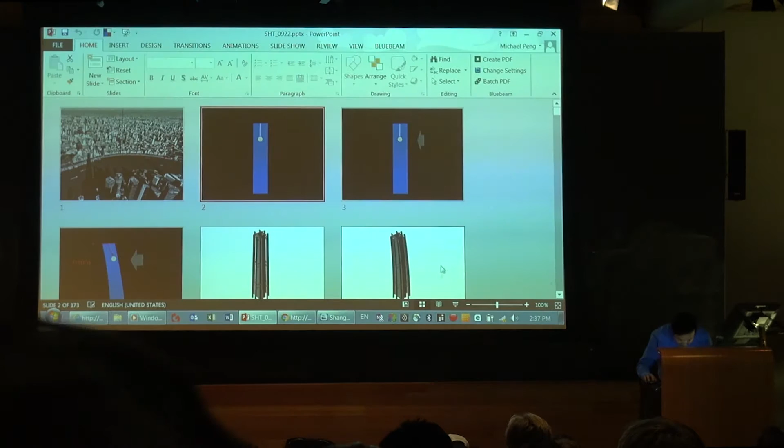It's a really quick experiment I did in my bathroom. Sorry, it's kind of rough. This is like the structure of the building, right? So if a typhoon comes in, it moves fast like this. And then if you add more weight on it, look what happens. Yeah, it's getting slower, right?

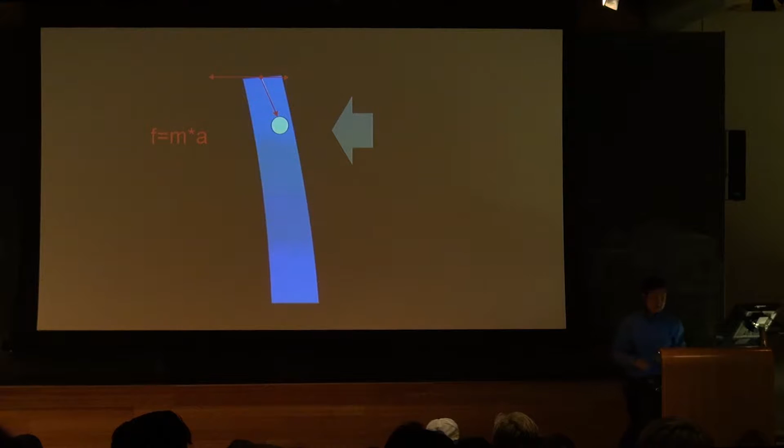So it's actually a comfort issue, and it also helps protect the structural joints of this building, because the seismic will hurt this kind of connection. And so this is what the structure does, and this diagram shows how that thing moves when the typhoon comes in, go this way, even go this way, right?

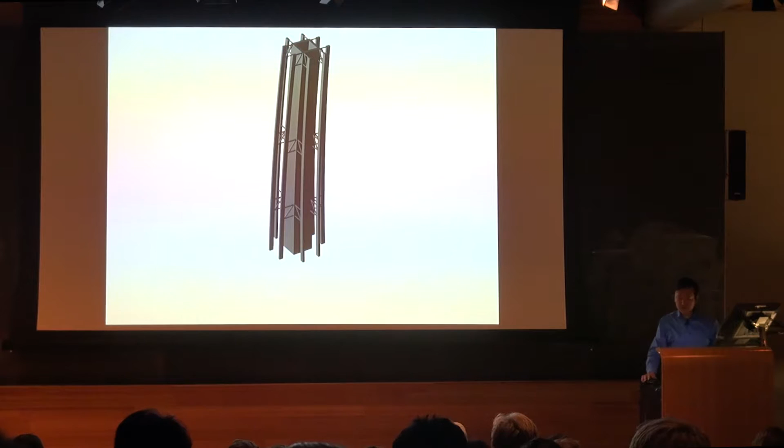So we have the typical regular structure system. This is the core inside. We have a super column outside, and then connect with the outrigger here. So this diagram shows the overall structure system. And this structure is sitting on the mat. So these piles go into the earth, I think around 80 meters. We have thousands of piles supporting this mat.

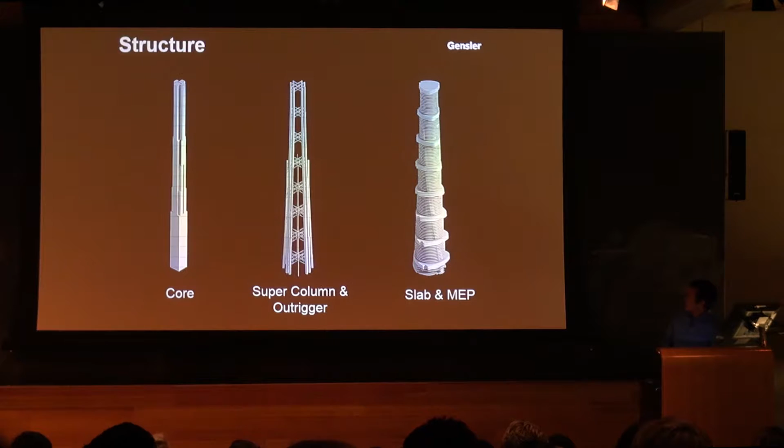So this picture shows the system of the structure. We have the core, we have the super column, outrigger, and then also the slab. And this shows the major structure and then the skin structure surrounding the building. So more detail about the structure system, you can figure out the different colors.

So we go core first, the steel wall pieces connect with this yellow beam, and then the super columns surround, and then we connect with the outrigger, and then also the belt truss connects all those super columns. That's the typical structural diagram for the Shanghai Tower.

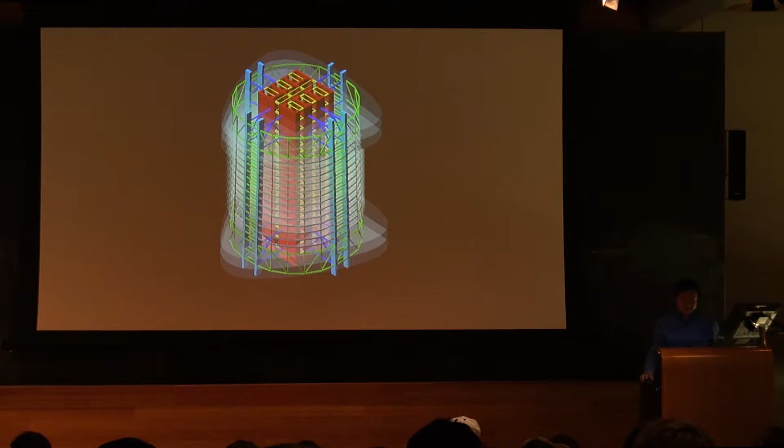So we did the test in the Beijing architecture science lab. We built this model at 1/40, and then we passed the test. It works very well.

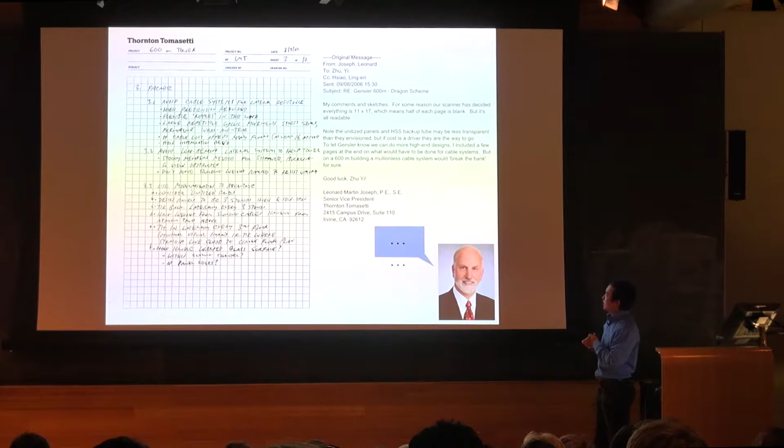Okay, so let's go back to the very early stage of the design. So I joined the competition team in 2006, and before that, we had a bunch of studies. So those people come from the Thornton Tomasetti. He's the senior engineer for the Shanghai Tower. He developed the overall system, I think.

So the first word about the structure is efficiency. Let's say cost efficiency. Because the investment for this kind of huge project is extremely sensitive. So any decision you make early impacts all the cost for the construction. So any system you use should be simple, regular, easy for construction, and cost efficient.

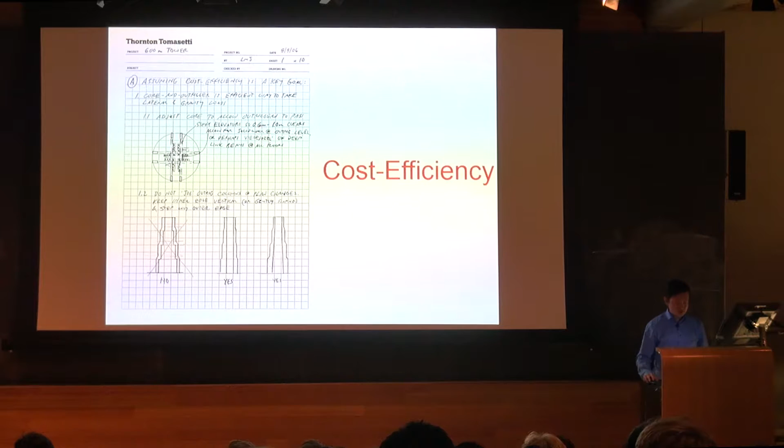So he used ten pages of sketch paper and one pencil to do this very early study, and you can see the diagram at the concept phase. This building actually used a square shape outside and a round shape inside. And later we changed this square shape to the soft triangle because of a suggestion from the wind engineer. I can tell you the details later.

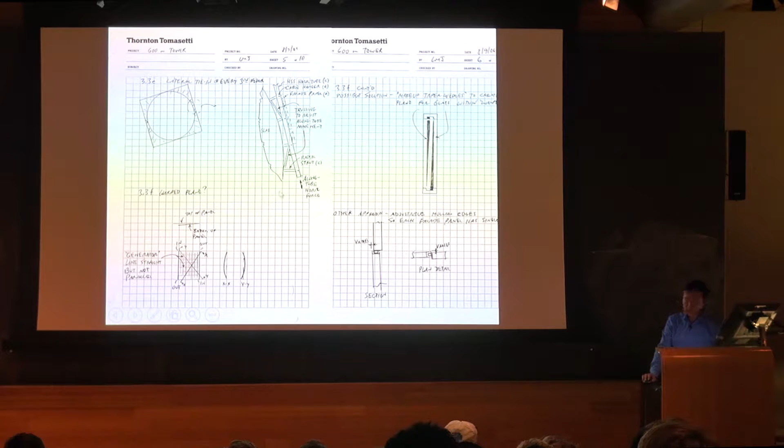And then he also mentioned if you twist this geometry, you have a lot of trouble generating the panels. So you have non-coplanar details to connect these facade panels. So at the end, I think the goal is cost efficiency, and you can see where the investment goes: structure, MEP, curtain wall and something else. This overall picture shows the cost.

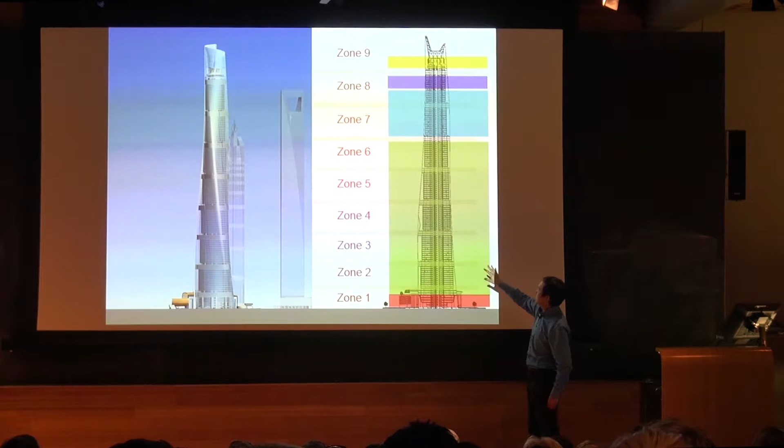So back to the tower itself, we have a simple diagram showing the function, the program. That area is the public space for retail and the conference center. The green one is the office zone. And then above the office zone, the blue one is hotel. Above the hotel is boutique office.

And then the yellow one is the observation deck. We have 3 layers of interior observation deck. And above the yellow one, we have 1 floor, level 120, the outdoor observation deck. It's still under construction right now, and we have a bunch of wind turbines in this area. So this is the very early competition rendering we did for the Shanghai Tower.

And then back to the vision for this design. The client gave us a challenge: they want this building to tell the story about China, about the future. I'm sorry it's all Chinese, but I think so.

We came out with some ideas based on the requirements from the client, and we wanted to create a geometry, a form that is really unique, both aesthetic and technically reliable. We believe this building should belong to all the Chinese people, and it's also looking forward to the future, and also looking back to the past.

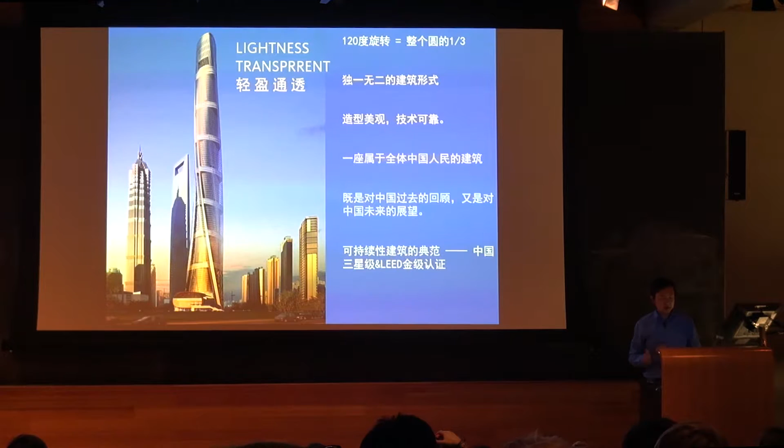We also came up with the idea of what a vertical city does, because most prototypes or developments in China use a kind of mixed-use block with high rise, low rise, public space—some typical downtown picture. So we thought, how can we make the public space vertical, so it stacks within itself?

There were only a few super tall buildings in the world that did this function, especially before the Shanghai Tower was built. We showed a simple diagram and put this kind of space around the building, matching our original idea. We have a circle shape inside, and a twisted, soft triangular shape outside. Between these two layers we have a buffer zone.

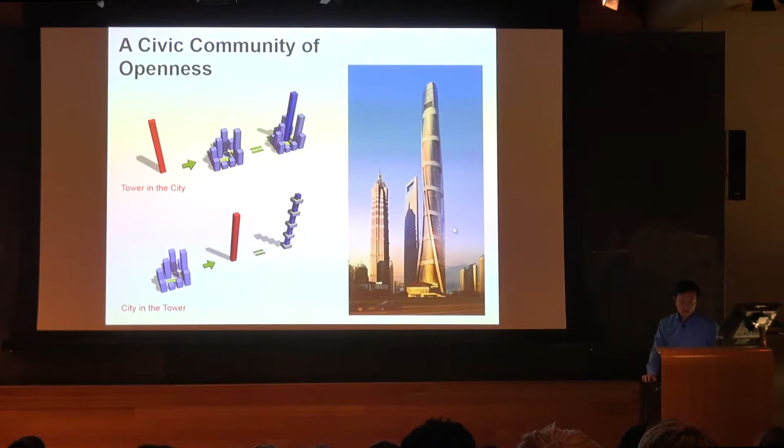This zone not only serves as public space, it also gives us a lot of benefit to reduce energy use. The idea is linked to the original Shanghai residential style—they have yards, a lot of semi-public space, and this also shows up in our atriums here.

This is the sky garden, and this is the outer layer. So you feel it—you go into this space and feel that something is far away from you. If you live in that second layer behind the glass, you see the sky or the storm slowing, everything—you feel really safe. You have a double layer of space helping keep you far from these nature scenes.

So it's a kind of unique appearance—I think a lot of people feel it right now. You have office space, your workstation in the sky, and then the second layer, the garden view, and we actually do have a traditional garden. I'll show you the image later.

Another idea was to create something really special, because these two buildings have a really classical architectural prototype—symmetric or half symmetric, with a tripartite division language. We heard some really good comments from people living in Shanghai saying these three buildings have different characters, like Jinmao and Mori Tower.

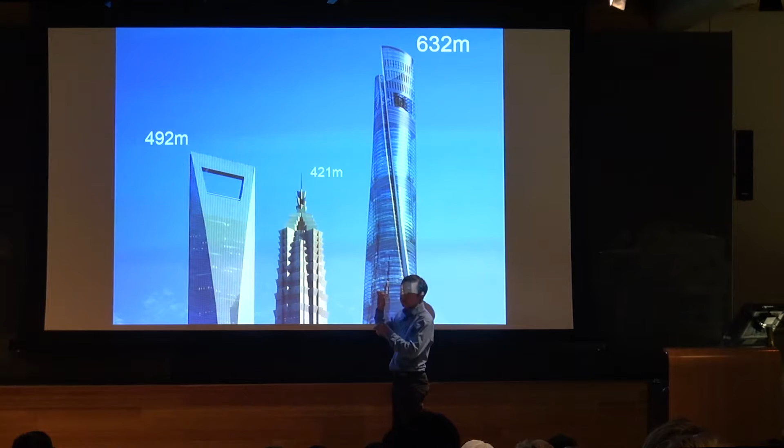Then we have this view after the final curtain wall was installed, showing the different heights of the buildings. Shanghai Tower is 632 meters, Jinmao Tower is 421, and Mori Tower—Mori Tower is 70 meters higher than Jinmao, and Shanghai Tower is 140 meters higher than Mori Tower, double the difference. So this is the relationship between these numbers.

You can see the really soft geometry gives a very special elevation. Each side of the building has the same character, unlike Mori Tower where one side has one view and another side has a different view. I think we achieved this, and the client was really comfortable with the concept.

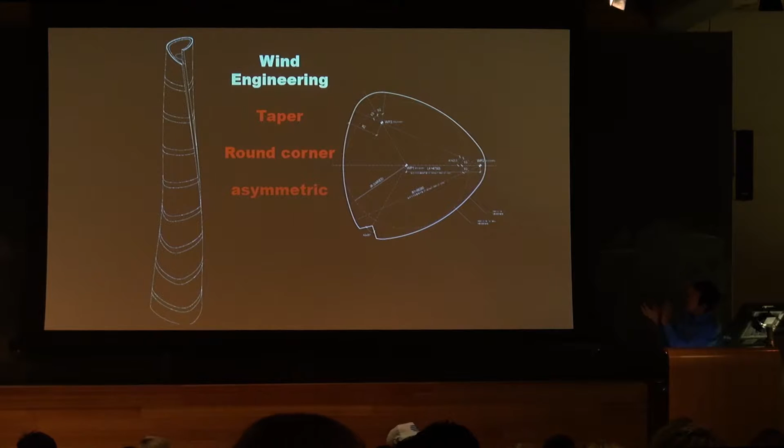It's not only an aesthetic issue—it actually came from the wind engineer early in the design. They gave us three really important comments: the building should taper as the tower goes higher, it should have a round corner, and it should have an asymmetric geometry. So we did a bunch of studies to achieve this.

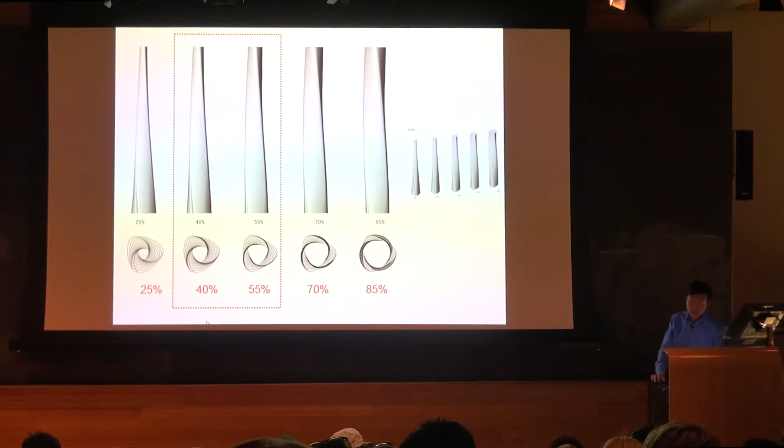The taper was kind of easy. The rotation creates a really asymmetric geometry at different levels. We worked in-house to develop a series of models and sent them to our engineers, especially the wind engineer, to test. We also did a bunch of 3D print work to address design issues.

This model was tested in Canada over two rounds of testing. The first was based on a small scale to verify the rotation of the tower—we tested rotations from 90 degrees to 180 degrees.

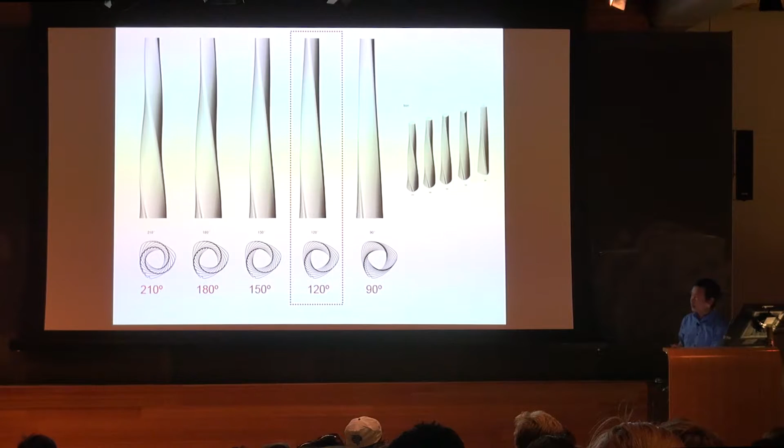From the elevation, you will feel this building is too weird, twisted too much. So finally we picked 120 degrees as the final number, and then that one shows you the result. So this is the test about the rotation.

We also did a large scale model to test the pressure on the facade. It was tested in 2008, Chinese New Year, and then in Canada.

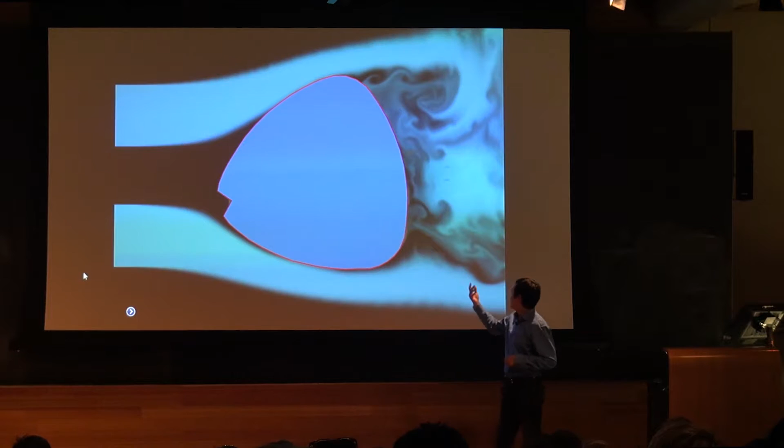Then you will see the wind profile at each level. The wind comes this way, and creates some kind of vortex at the backside, so the negative pressure is higher than the positive pressure. You can see the movement goes like this way.

So that's called the cross movement. The building in the wind will go like that, facing the wind. And this diagram tells the pressure of the facade.

The negative side has a hot part at this position, reaching up to 6.5 kPa. We use this pressure to design our glass structure.

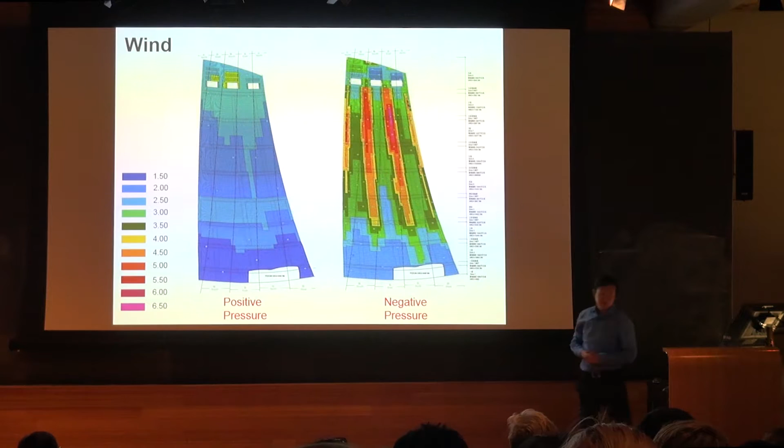You can see this number, 120, has almost a 24% reduction compared to the regular shape. What that means is you have less pressure, so you can design a more lightweight structure. That saves a lot of money.

I think we almost have 400 million for this. Close.

Then, after this geometry was verified, we went to the more detailed level of design.

You can see inside it's kind of stacking, a series of cylinders stacking on each other. In between is the mechanical zone, and the outside glass is twisted, also tapered. Then in between is our sky garden, the buffer zone, acting like insulation for the overall building, and then you have the public space here.

This one serves this zone because we have 9 zones. Each zone has 3 sky gardens.

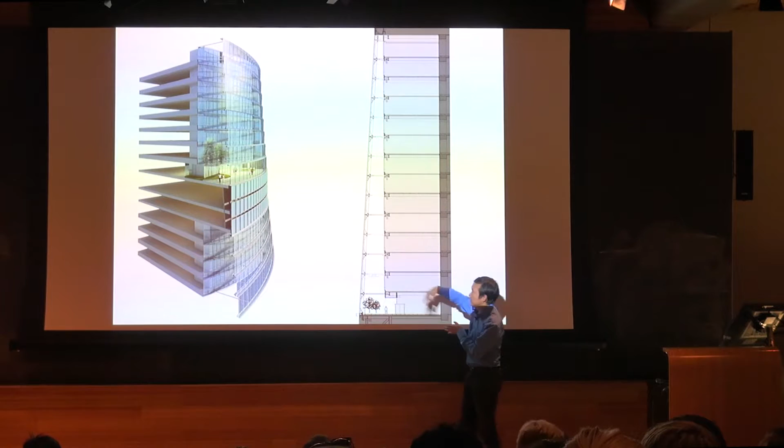So there's a 2-level mechanical zone. One is the typical mechanical space, and another one is the refuge area. Because people egress from this building, if you're from the top going to the ground, it's almost

like 1.5 hours. If some kind of accident happens, people will go to the refuge area. It's really fully protected.

Then the air has some kind of movement in the sky garden. At the top, the hot air will go to the top of the atrium and then exhaust to outside. So this air acts like insulation for the building.

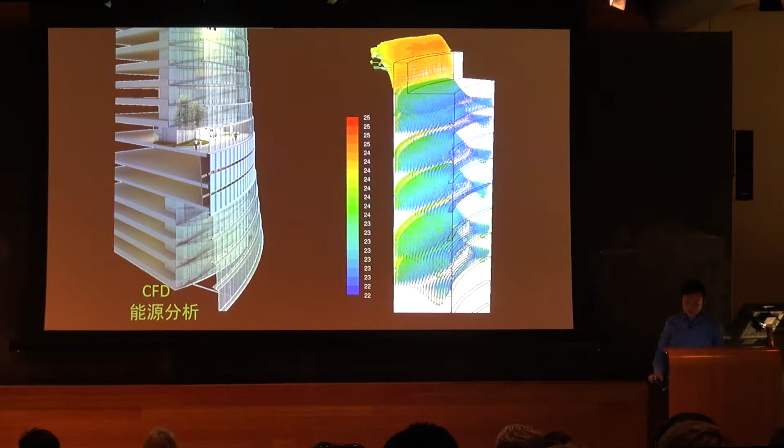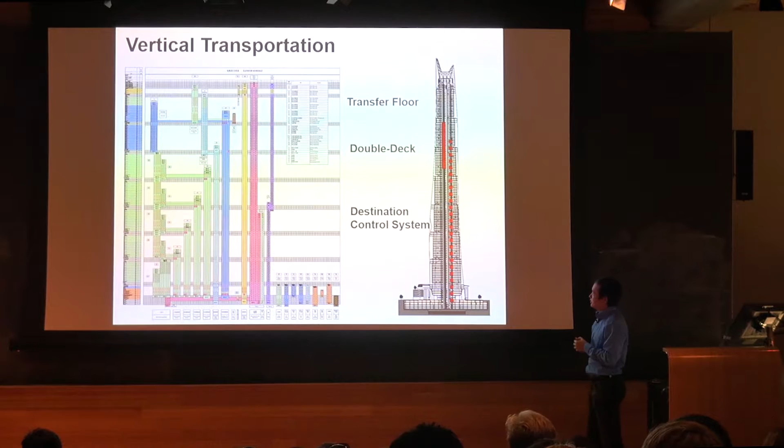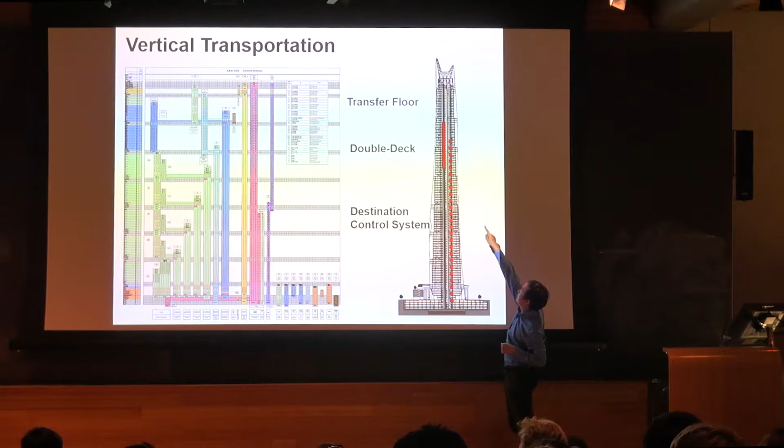108 elevators. So we need really good organization of these elevators. They should stack on each other, and for some levels, like going to the high zone, you need to transfer at the transfer level. So you take the high-speed train to the Sky Garden, and then transfer to the local

So we go like this: this is the express elevator, 10 meters per second, and you take this shuttle to this level, transfer to the local elevator, and then land in this certain zone.

The good thing is we have public space at the bottom of each zone. So for some reason, if you want to meet your friend, have a cup of coffee or some kind of food, you can go to the

amenity level, because this one provides this kind of function, so you don't need to go back to the ground using the shuttle. This reduces a lot of energy for operating this elevator system. You get the idea: the structure, architecture, and vertical

transportation work together to make the tower really efficient, so people can really live inside. And then the challenge is the shape: the geometry is twisted and tapered, not normal compared to a typical super high-rise.

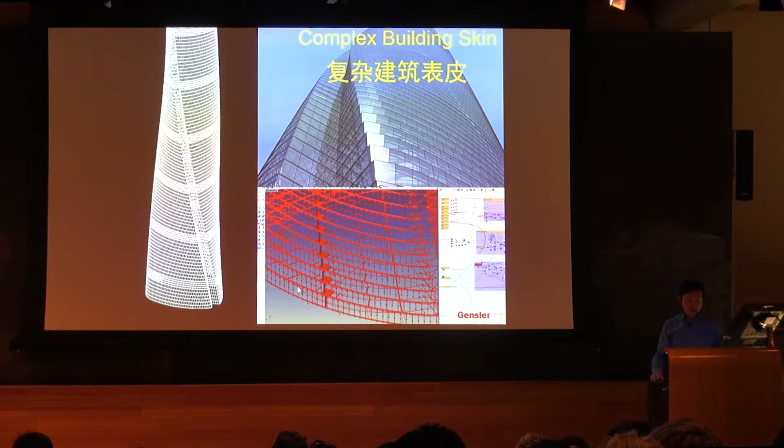So to develop the system, we did a bunch of work on how to define the system and the building's overall geometry.

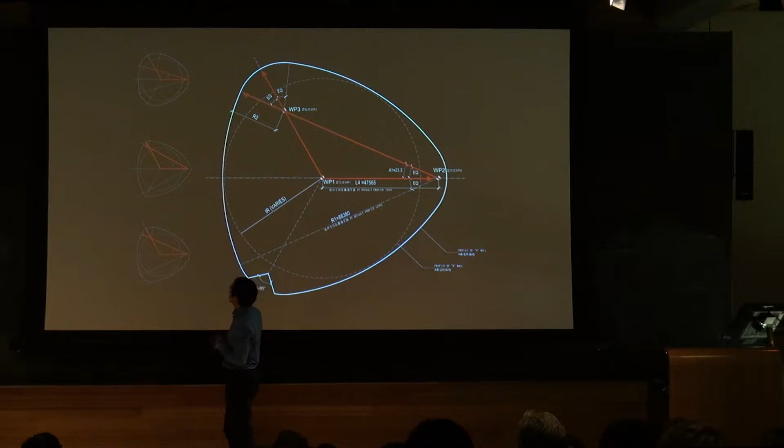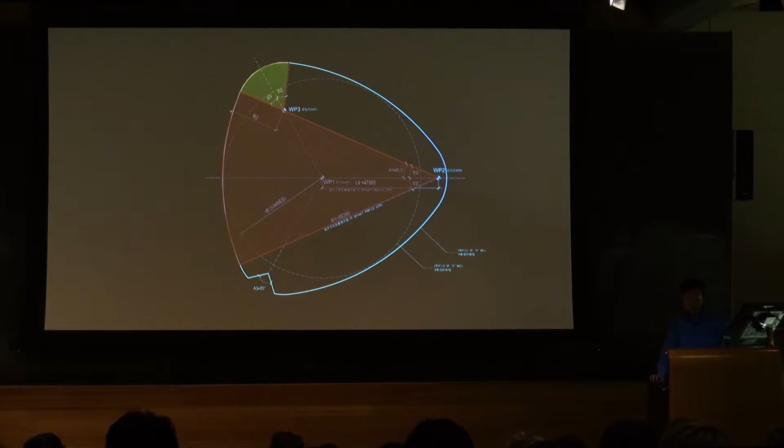So this shape balances these two images and creates a really good span for the sky garden, and soft geometry that also works with the square meter of the inside. So we use the A1 angle to draw the geometry and then did some kind of rotation study.

After that we are going to think about the scaling. That one is a little bit kind of chunky because we have kind of simple percentage tapering, or we have the linear tapering.

This is 2007, I did this sketch, and then came out the idea - if we use formula to control the scaling, so maybe we just go to the mathematical way, not drawing everything in the tower in the model. We set up the algorithm.

After that, we used some kind of parametric program because Grasshopper was just introduced to the world, and we were among the first people to use that program.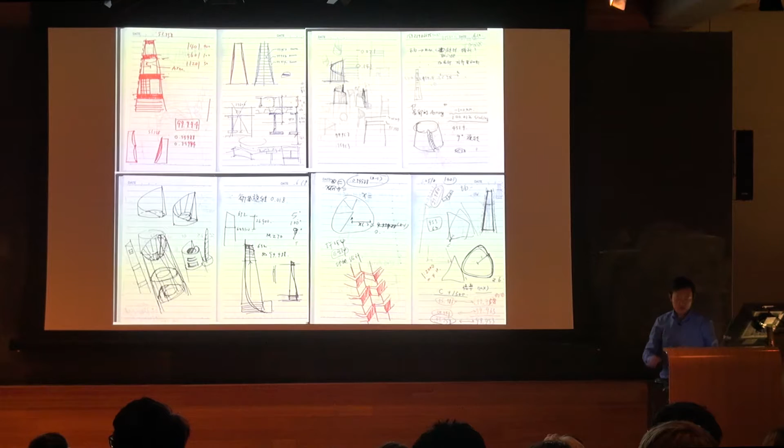You can see the percentage goes to exponential scaling, and this formula applies to the tower. So you just need to input your elevation, and then set the reduction number. So everything is generated in the program.

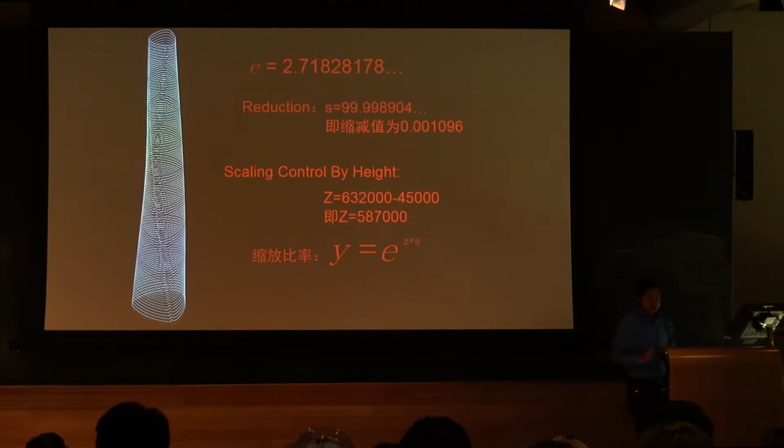We used Generative Components early. That one is based on the Bentley MicroStation system. As only a few people in China used the program, we felt that wasn't good for communication with our consultant - I think Foster's office used it a lot.

But we learned something from Generative Components - the process of setting up the parametric model. That one is really good. So we ran this geometry in Generative Components, and then later we moved to Grasshopper.

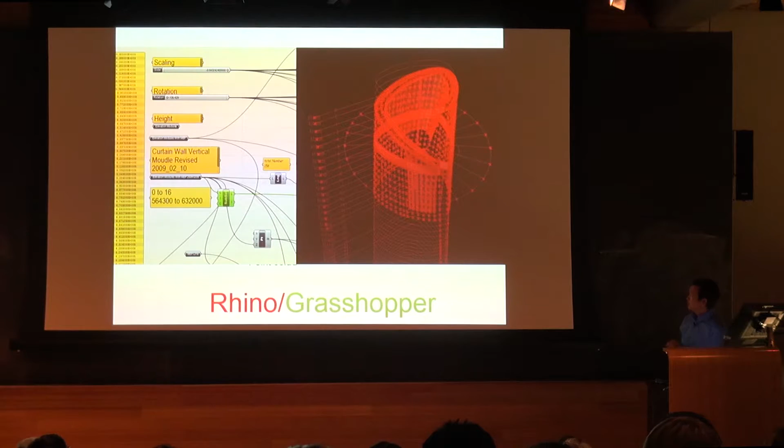So we did this study in Grasshopper, like I showed you before - this scaling, twisting. And you can see this really early sketch, like at the top, I think it's 2009.

So this group of components tells the basic geometry. You can see this kind of comments - the yellow pad is the kind of narrative about these different components.

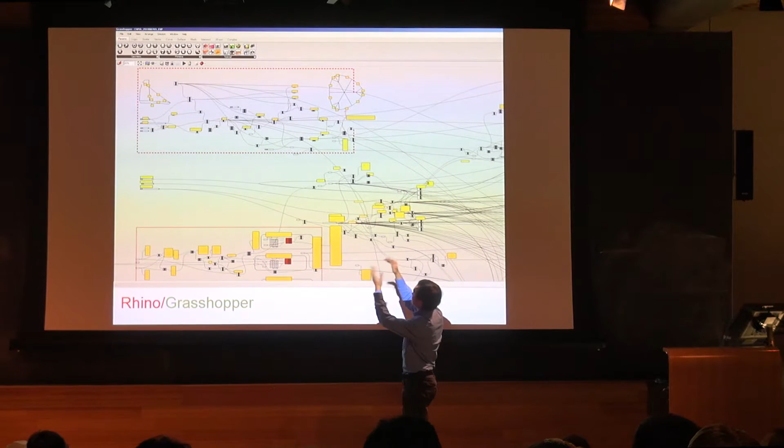And then you just add different sliders, like the horizontal module, the rotation, the scaling reduction. So everything is controlled by these three numbers.

So that model was built up really detailed. You can see the outer skin and then the inner skin, and we have panels, we have the support structure behind the panel, and then this kind of struts back to the main structure.

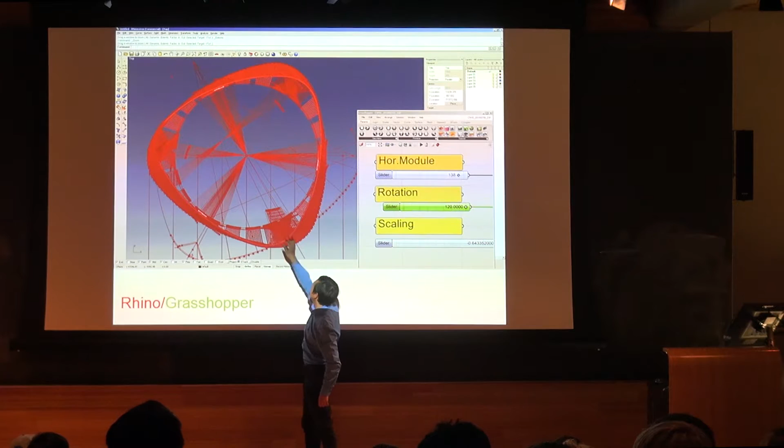So if you change this number, the whole model is highly linked, driven by this kind of key number. So you can have this 3D model, you can have the floor plan.

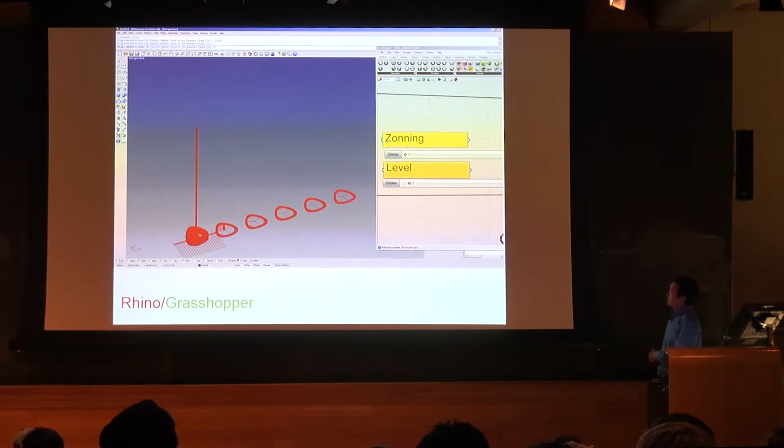Because when we used this program at that time, it ran really complicated, so we set up the geometry zone by zone. It kind of helped us reduce the time to generate this geometry.

Then you can see, you just change this slider for different zones, so anything just generates automatically.

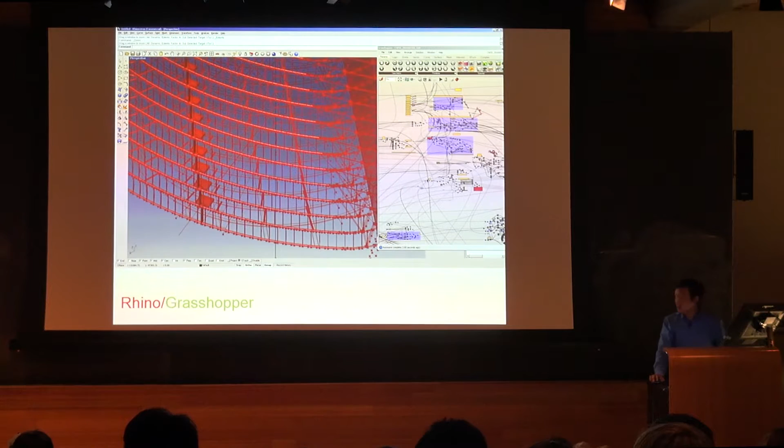We built almost every kind of structure component in the parametric model, including the expansion drawing of the structure. And then all that data can be generated from this model and sent to an Excel file to format, and also the CAD program to generate those drafting floor plans.

Furthermore, we developed the facade system because of the twist of the geometry - naturally we have the line follow the twisting, so we have the shingle option, because if you twist the geometry, these 4 points are not in the same plane. They're always 1 point out of the plane.

Then it creates a really complicated situation to do the detail here, because the waterproofing - somehow that's not that easy when you design this detail when it's not in the same plane, the facade.

So to resolve this problem, we also developed some kind of skin system, like cold warp, so the panel is not flat when you apply it to the facade. It's fabricated in the factory flat, so when you ship it to the site and install it, you just push one point attached to the structure. So it's called the cold warp system.

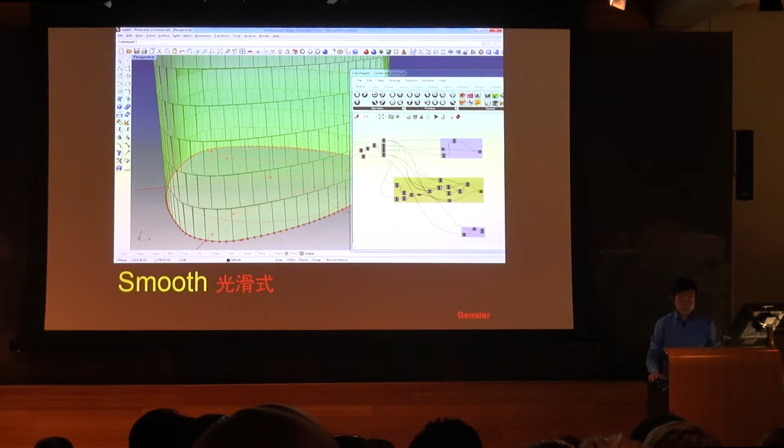So at the end, we just said, okay, let's just extrude the floor plan straight, and then we have a typical rectangle panel at each level, and you have stepping at the interface between the two levels. So that one we call the stack system - that's used for the tower right now.

And then this image tells the one system - I think that one should be the smooth system. Yeah, all the definitions of the components, and then all those numbers generate this panel, the yellow one.

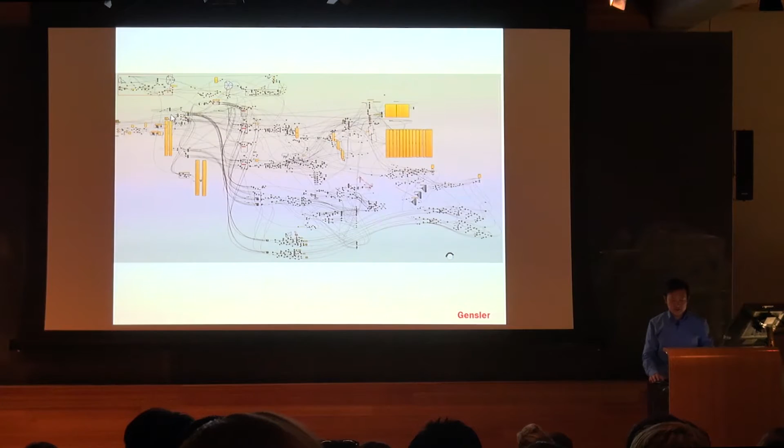And then what's good for this program is you can link any input, like the nonlinear system. So we found a problem: the panel has a conflict with the truss here, because what we call the curtain wall support structure is actually hung at the mechanical zone from the solid truss. So this truss conflicts with the margin here. Then we just add a shift component to the floor plan, and all the panels shift by this slider. So it doesn't impact the overall model. You just add one component here and regenerate everything automatically.

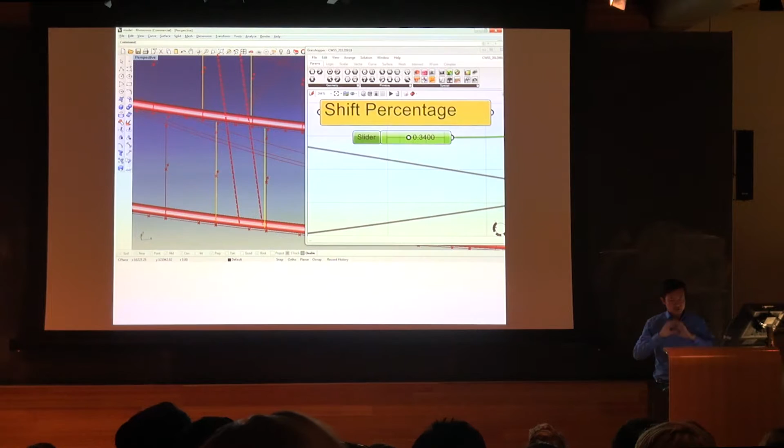And then all those numbers we grab from the model, and each panel has different information like square meters. For the smooth option, you need to understand how deep the bending will be. So this diagram is the typical panel, and then we generate these numbers in Grasshopper like this. All these numbers show here, and then you just send this data to an Excel file, and this is the final format for this information: which zone, which level, and which panel. And then you have the length, you have the T1. I think that one is how deep the bending will be.

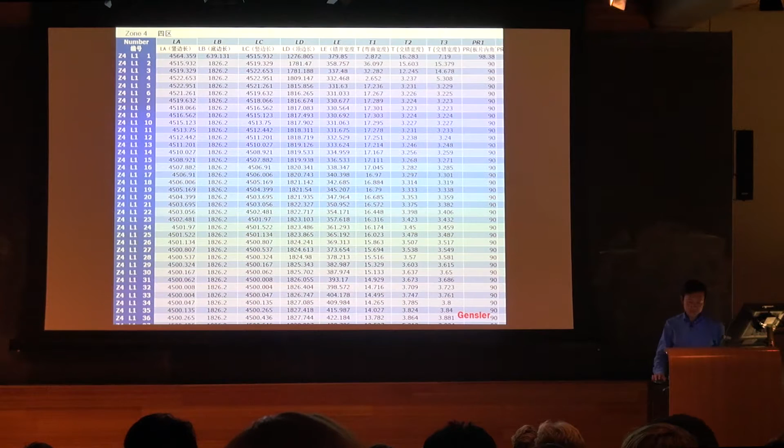And then you figure out the detail, like you need to understand when this bending goes this deep, how the details work. So this model also deals with Digital Project. We worked with Gehry Technologies, the company. They gave us a one-month license, and then we did the engineering model in Digital Project. They integrate BIM and also parametrics.

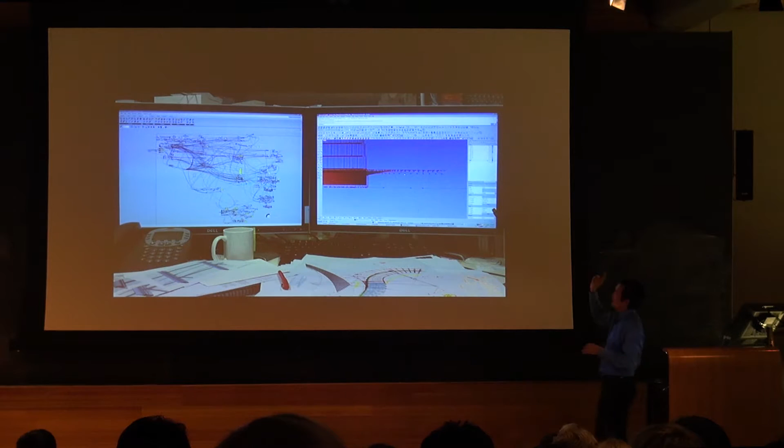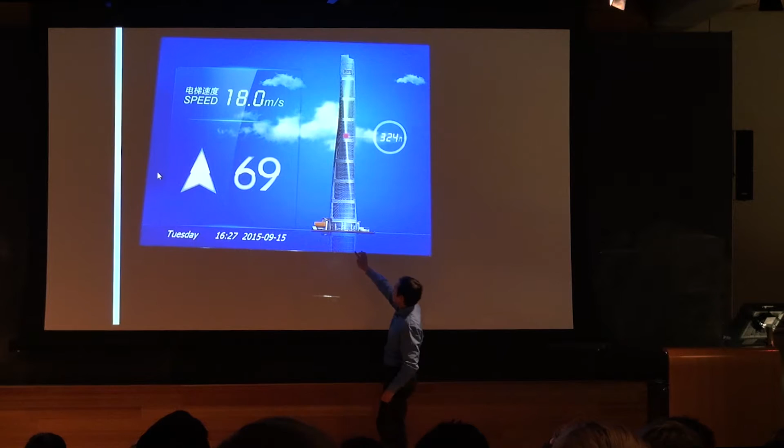And then the elevator. That's the really high-speed elevator for the observation deck. We have 3 elevators from basement 2 to the top of the observation deck. Each second is 18 meters. Right now it's the world record for the fastest elevator. And then there's the observation deck, just finished, and the outdoor observation deck. We have a lot of wind turbines here, just generating energy from the wind.

Oh, there's something wrong. Sorry.

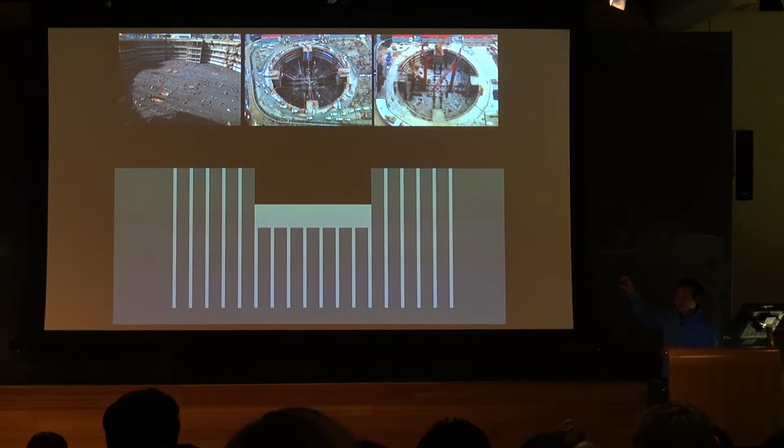Let's move a little bit to the construction side. So this is the ground of the building. We did the first piling in October 2009, I think. And then they just kept piling at the site and dug the hole for the foundation. So you need a 6-meter-thick mat put here, and this dimension is 120 meters. And on this foundation, the concrete mat, we started to build the core steel. Let's go up.

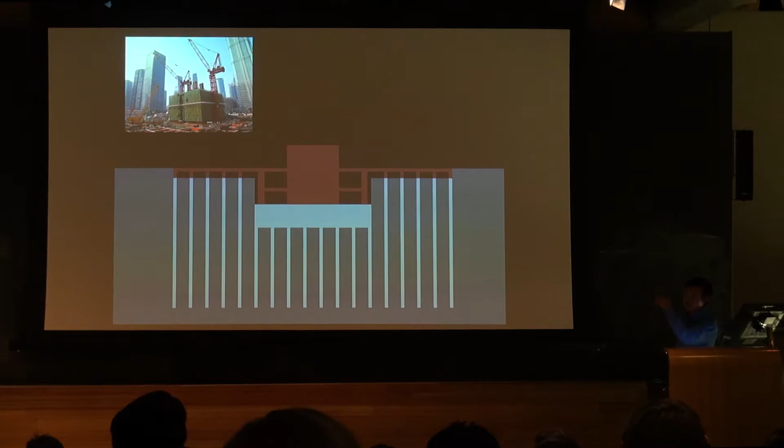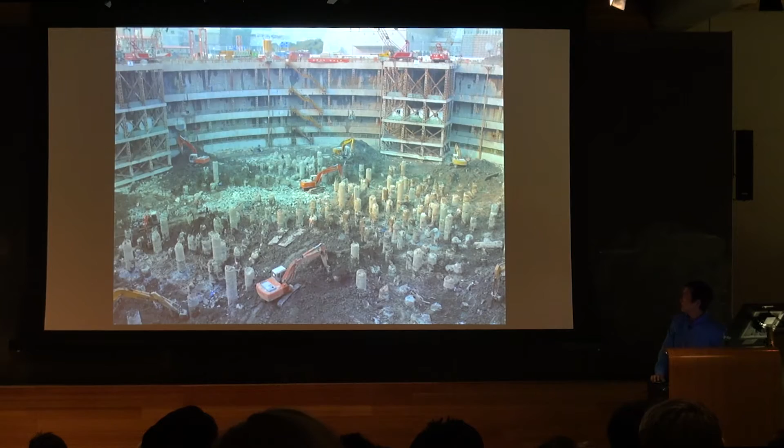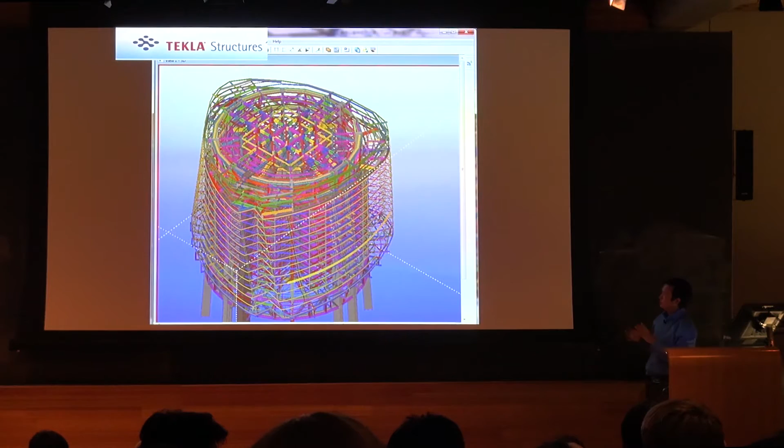So the contractor built everything in Tekla, including the main structure, the support structure, everything in this model, and with really detailed information, because this model goes to the fabrication system. They generate everything from the model. And then you can see outrigger has a lot of pieces.

We have radial truss. This truss hangs the curtain wall system. This is the super column, the steel section inside. And then that one is outrigger, double floor height truss. So each color means that piece is built separately. And any information has been built, even the bolt or the detail connection. And this shop drawing is generated from the model.

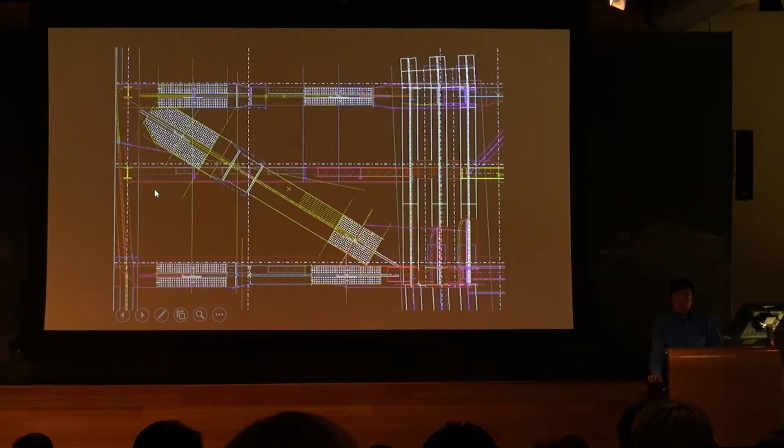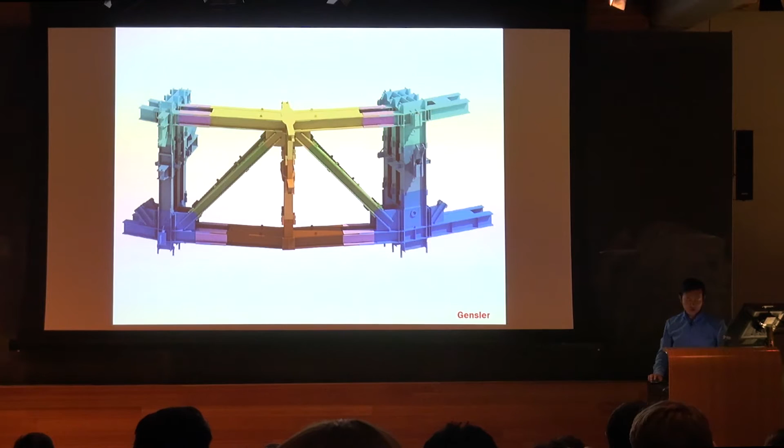So the labor, they build this piece. And then for some reason, the welding or cutting, this part will never be like the computer shows, they always have some kind of problem, the shape, the deflection. So then you can see that piece has different kinds of parts. So they build it, and then they put it on the ground in the factory, and then they scan this to the computer.

Because I think before, to fix this truss, they build this in the factory temporarily to test it. But our system is kind of huge. I think nobody in Shanghai can provide this kind of big space to assemble any part and then fix it. So the way is they scan each piece to the computer and then assemble this thing in the computer to figure out which part is wrong, or they need to cut a little bit, or they need to add a little bit more. And then when the fix work is finished, they send this to the field to install.

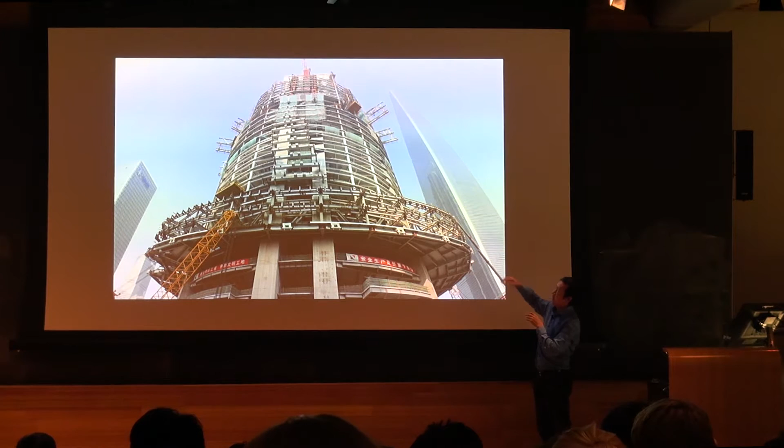So this is the truss installed like that. And then when the force is added to the structural system, they will have the next round of deflection. And then the guys around this building will survey this information back to the computer for the next round of structural design. So the data just keeps going: build, fix, install, and then measure again as the base, go back to the factory, design, install, and then survey. So the schedule keeps going.

So that way allows this construction to be really precise, and no part was replaced. Especially this structure supporting the facade, because the structure system is kind of regular. So we use different shapes on the outside to generate the geometry. So we can balance the system: we have a regular main structure, and then we have a kind of fancy outside scheme. So all the embeds were built in the factory, and then the manufacturer used our formula to generate this geometry, and then they tested this in the factory.

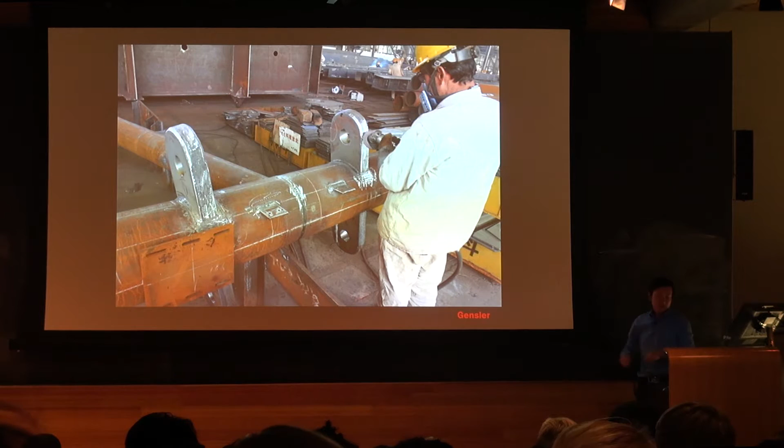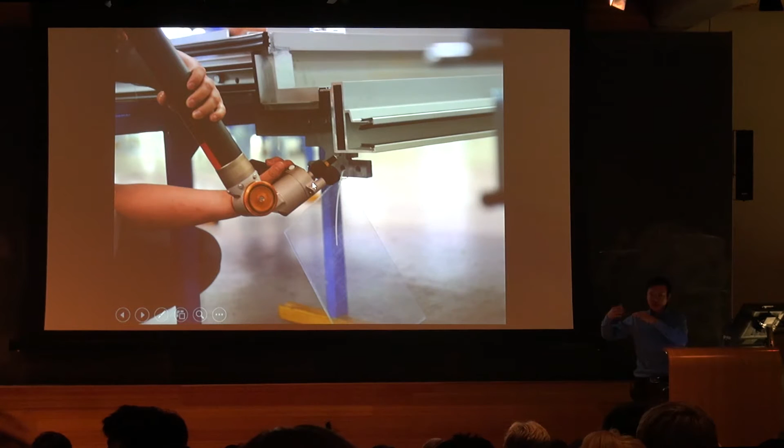It runs very well. I think this is the first time the design model directly goes to the fabrication system. It builds a link between these two areas. So they survey the structure around this building, and then the facade contractor also scans each panel after fabrication to the computer, and then they compare this data in the computer, structural data, facade data, to figure out any kind of conflict. So the process of the installation goes really well. I think they spend 15 minutes to install one panel. No panel has been replaced.

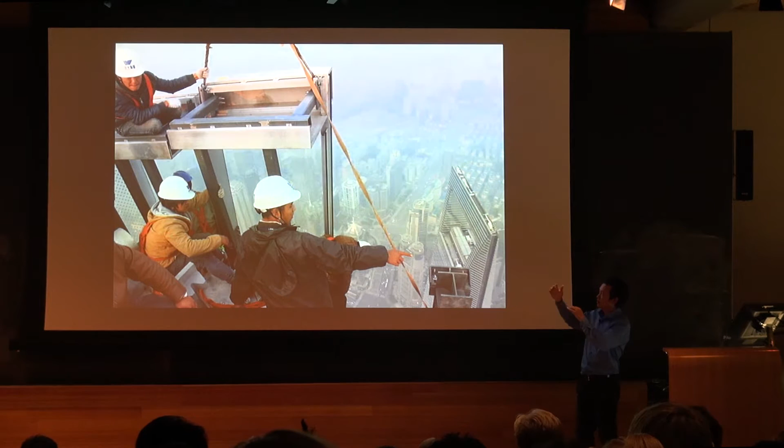And then this is the final panel. Yeah, the only conflict happened at the top. Because when the building goes to this level, the overall thing goes down like 10 centimeters, 4 inches. So the panel, I think some kind of mistake happened. The panel was fabricated based on the original elevation, and now the main structure is raised up 10 centimeters to absorb the tolerance. So that piece could not be installed at that time.

So I was there waiting almost 4 hours to install the final piece. So typically 15 minutes, but the final one is 4 hours. It went into the evening. That's the final one. In this kind of traditional way, they have a red flower on it, right?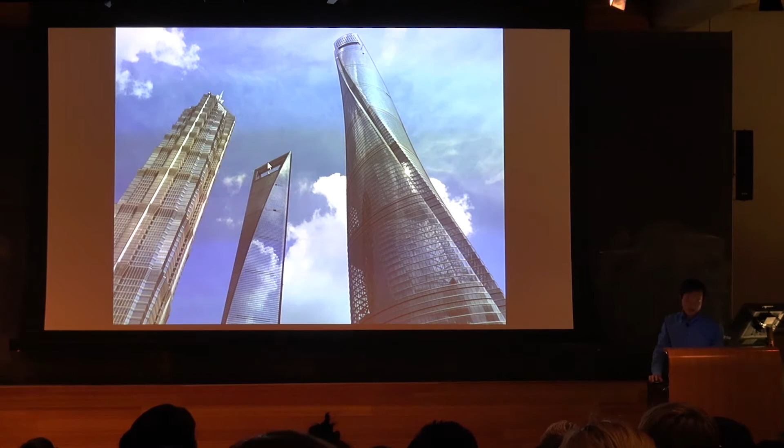And this is the image of the building after construction. That one's not so good. I don't like it. So the canopy is good, it's warm, very welcoming.

And right now when you keep a little bit far away to look at the building, this twist geometry looks like a very traditional Shanghai dress. It's called qipao. I don't know how to say this in English. They have some kind of line going like this way, right? This qipao, yeah.

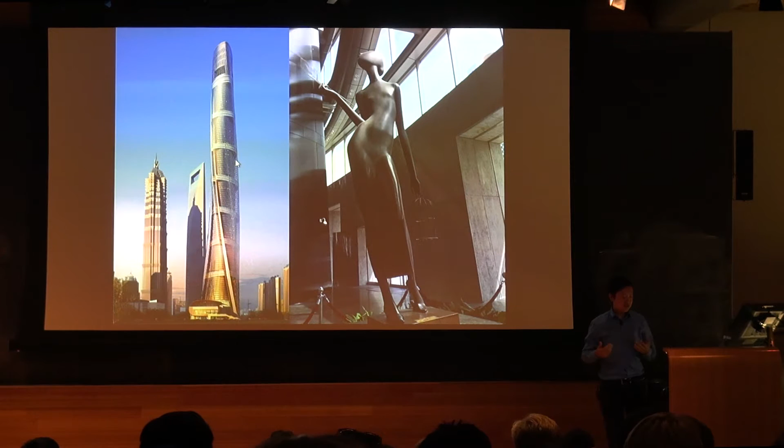So that's the overall story about this building. I share my experience from 2007 till this January. I moved from Shanghai to San Francisco for an internal transfer and will be staying in America for a couple of years. Have a different experience. I think it will open something for me, like a different eye, meet different people, share my story, and also listen to you guys, and just for fun. Yeah, that's it.

Any questions? Oh, okay, I saw that first. Hey, so

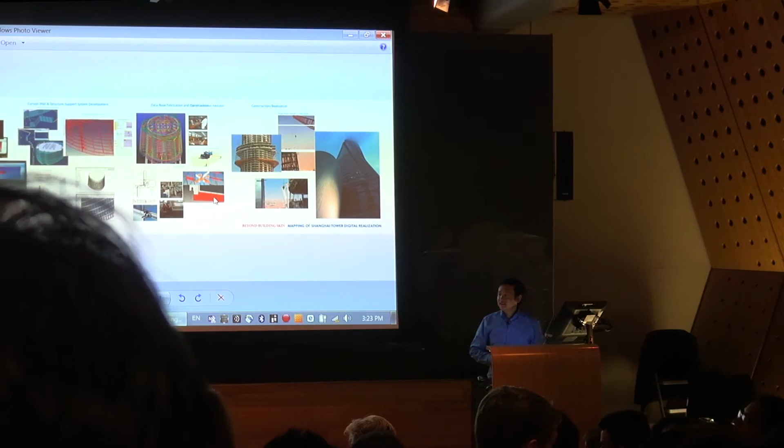I'm wondering why you chose Grasshopper for the software over, like, Revit or CATIA or some other software. Could you talk about what you thought was beneficial about using Grasshopper and Rhino, and why you chose that one?

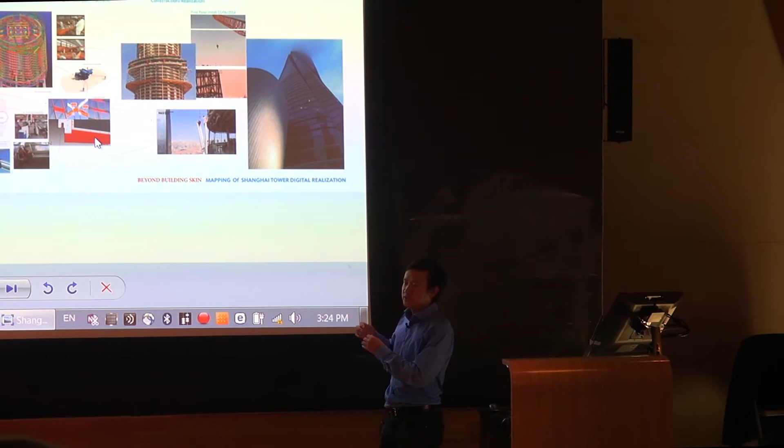I think in 2009, we felt it was really difficult to have a really good study in the programs we had at that time. We did use Revit and 3ds Max and Generative Components, Rhino, to develop the system. But we got a one-week workshop from Bentley. They introduced how to use Generative Components. And then this opened the area for us.

Like, you can think about geometry. It's not the typical modeling way. You think about algorithm, you think about the process. And then you can lead the system at a very high level and not really build it with your mouse. We learned this from Generative Components, but we had a problem with communication. It's really hard for communication. The data generated from Generative Components is dead.

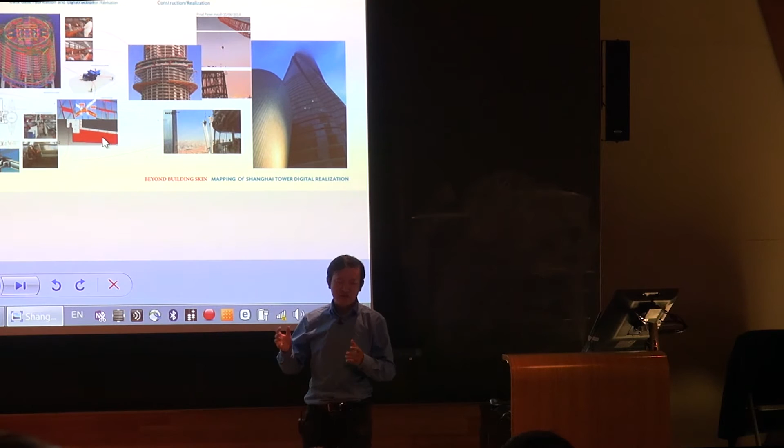You need to send this kind of DXF model to your consultant. It's not that different from what we do in any kind of program. And it was really an accident, I think. I was just browsing the internet with Google, and at that time, we didn't have grasshopper3d.com. It was only a Google group. There were a lot of people there. You just post your question.

Oh, that's cool. How can I mirror this line, how can I generate this plan? You just post a question, and a lot of people there answer. That was the first Google group. And then the program wasn't called Grasshopper. I forget the name, it was another name. And then we found it had much more benefit than we expected. It's good for sharing, and you can grab any deep-level data from the model if you want.

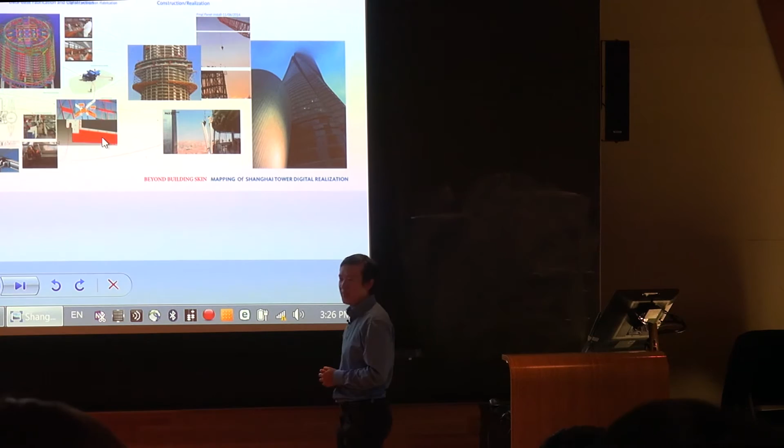Thanks, Michael, for the fantastic overview of the tower. I've been following it for a while now. It's great to see it finally completed. With towers, usually we see them as the entire form, so a lot of times it escapes the mind how the tower meets the ground. In this case, on one side it meets the ground with the same logic. On the other end, there's this big, shiny convention center. Could you give some insight on the design dialogue about how the tower meets the ground?

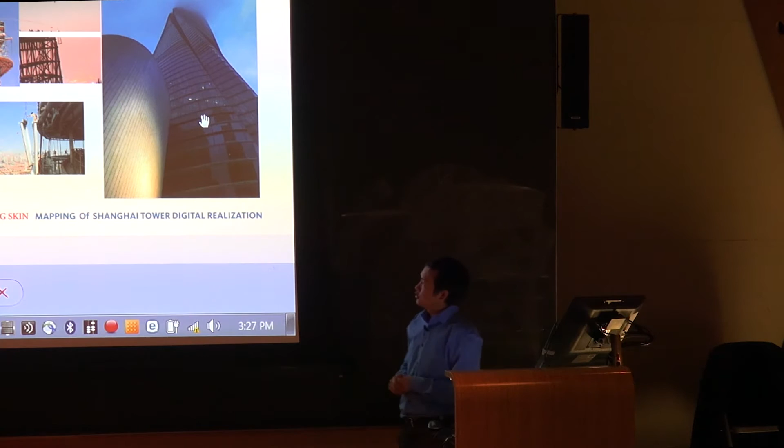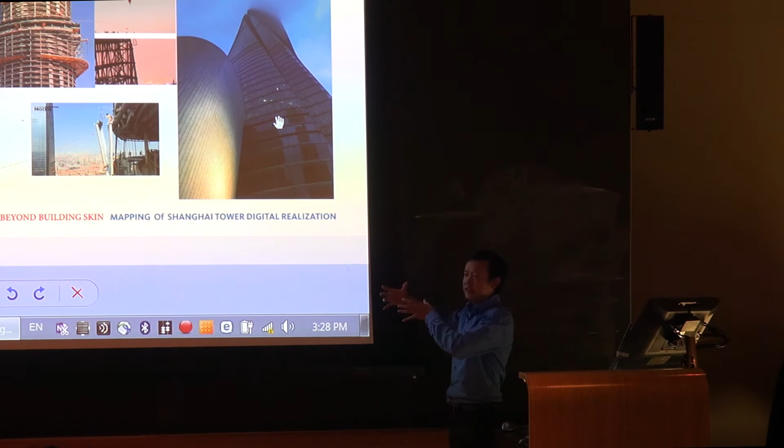Yeah, I may need to find a good image. So this is the tower hitting the ground, and the ballroom, the very shiny one, actually happens in this area, facing the Jin Mao Tower, and it also has a ground connection to the subway. On this side, because it's all residential, the site is quite limited, and there's a really strict requirement about the green ratio. We need trees, a lot of landscape, to keep the open space green.

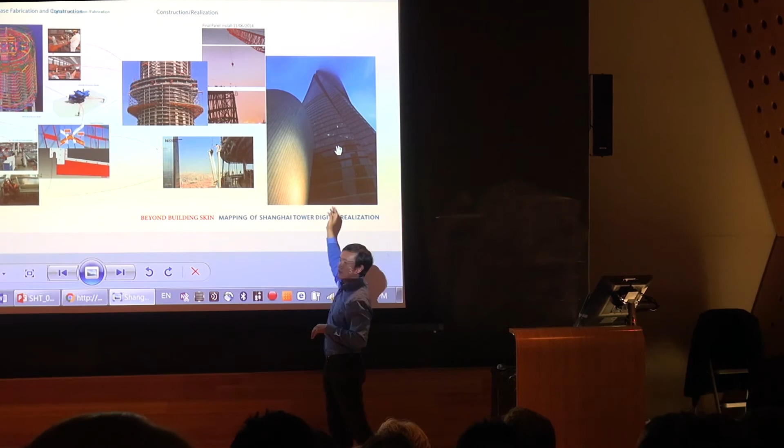So that side is totally the retail and conference, a five-floor podium, and a two-level basement that also has retail directly connecting with the three neighboring supertall buildings and the subway. About the ballroom, there's a story. We did the public space interior design, and the client said the ballroom didn't look that cool, so they opened a second-round competition to the world, and we won it again. The DC office came to Shanghai, did the competition, got it, and built it. The podium has a gold facade, not like the tower's typical super high-rise glass.

I don't know if this matches your question. Oh, the ground. A lot of comments say the ground is like a forest, because the Jin Mao Tower and the Mori Tower have fewer trees. They're all stone paving. So people like it because it's like the building growing from the forest. SWA applied this concept. They said it would be cool if this could contrast with the two neighboring buildings.

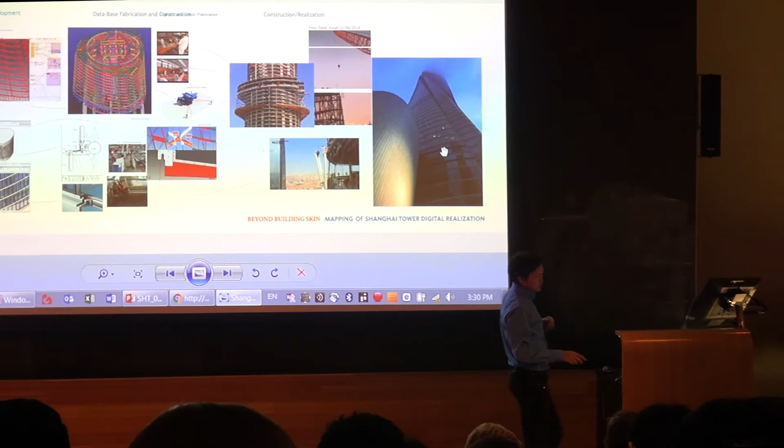So you had this great diagram which showed the tower within the city and then the tower as the city. What design strategies did you use to achieve this goal of a city within the tower, and do you feel it's successful, that there's a sense of community within the tower? Yeah. This image, let's say that one.

I think this amenity floor around this tower, we have 8 different kinds of public space. The one at 52 is the largest bookstore there, and it's open right now. So this bookstore is called, I don't know, it's from Taiwan, right? Yeah, it's really famous. They not only sell books, they sell a lifestyle.

And then we have one at 52, and then we have another one of the same brand. They have a big space at basement 2. And that one is open to the public and also linked to the subway. So we have a museum at level 40. I think it shows some kind of collection of Chinese traditional art.

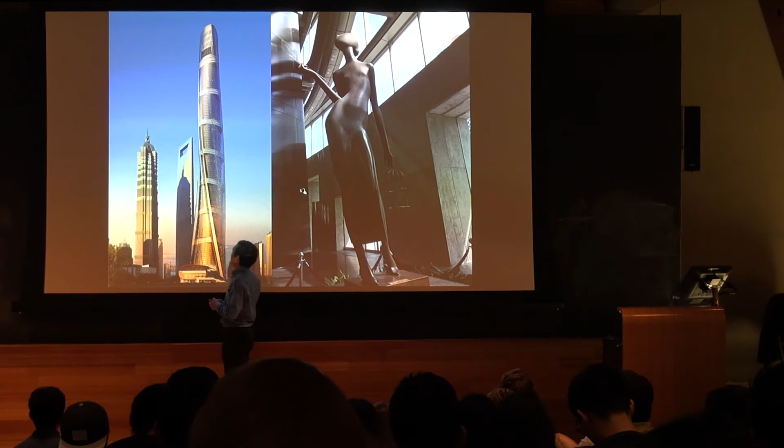And then we also have famous restaurants at different levels. So all those things are open to the public. It's not like the buildings where they need very strict security checks and you are not allowed in the area. They don't provide this kind of public space. So if you apply, you can go to any level of public space to enjoy your life.

You have a cup of coffee, look at the view, you buy a book at that level, and then maybe you visit the museum at the next level, and then enjoy the traditional garden, the picture I showed you. So this is a kind of organic system, and it happens in the super tall building. So we use this to express our original idea, how to talk with the city, how to bring these public levels, the function, the area, to all the people living in Shanghai, even in the world.

So I have been in Shanghai in October or August. I just followed the people, went to the observation deck, just tried to act as a tourist. And then I found the people really love the curtain wall area. We have really deep mullions, and then we have really deep steps. The people just sit there in silence, really silence. They just look at the city for like half an hour without any words. Each one has one space.

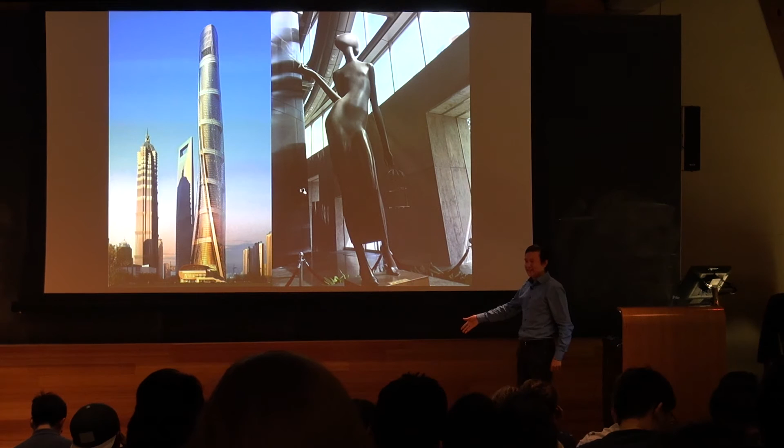It's a really good feeling to me because this was not part of the design scope. You say, oh, this curtain wall, stepping, but people love it. They just sit there and look.

I just want to add one comment. Also, the top of the building is not an observation deck with the giant metal thing. That's a world-first 5D theater, played only by sound. And you can hear the dimension of the sound. You can close your eyes. It's very dark. So we're all waiting for its official opening so we can see the first show.

And also the composer who passed away, what's his name? James Cameron? James Horner. I'm sorry, James Horner, for Titanic. He actually wrote a piece of music for the building. So it will be shown in the theater, totally on the top. So it will be really fantastic to see. That's the place. That's the theater. It's not traditional. It's not just an observation deck.

Also, the bookstore he mentioned, the Taiwanese Eslite bookstore, is open 24/7. So they try to introduce that to this building as well. So it's just non-stop, 24/7 life.

Okay, another question. My question refers to the facade. I was wondering, besides the airflow, how else did the context of the site affect the shape, the angle of the facade? Sorry. Besides airflow, how else did the site change the angle, the material, or anything related to the facade?